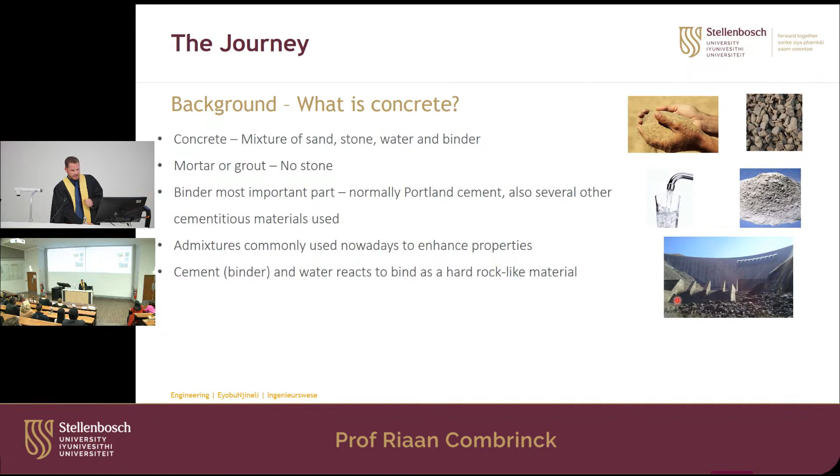So concrete is extensively used. It's used in large infrastructures like this dam. It's also used in small everyday projects. And next to water, only next to water is concrete - it's the most used material in the world next to water.

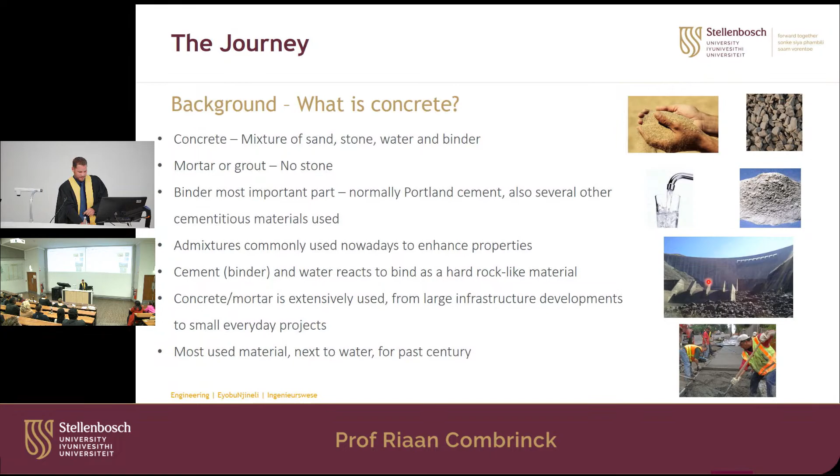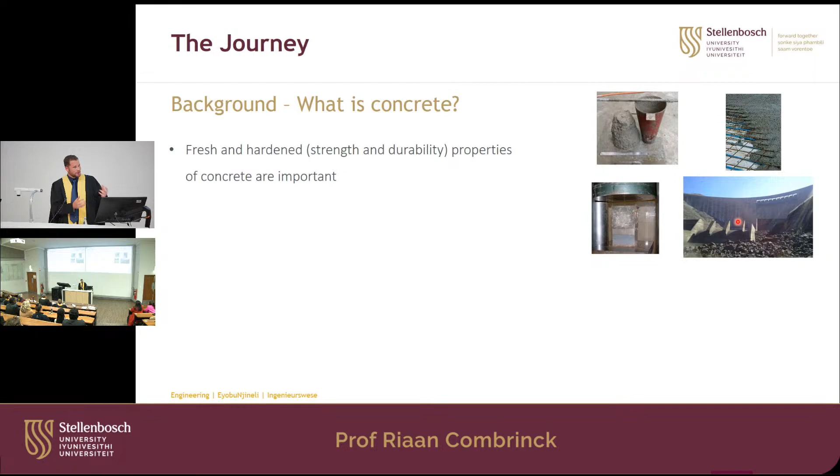Okay, so for the past century or so, the fresh and the hardened properties of concrete are very important. In terms of the fresh properties, you need the concrete to be fresh, moldable enough that you can get it into the formwork that you build for it, and also in between all the reinforcing steel. And then it also needs to be strong enough to take the loads that are applied to it. And then very important, something that's often overlooked, it needs to be durable in the setting or in the environment where you actually place it.

And concrete has actually proven to be durable. If you look at the Pantheon, which is almost 2,000 years old, it has stood for a long time as testimony. But I think there are some important lessons we can actually learn from the Pantheon if you look at how the Pantheon was constructed versus modern structures.

The one thing is the concrete in the Pantheon is only in compression - concrete likes compression, where it wants to be. So there's no tension forces, just compression. You can see in this dome of the roof, everything is just in compression. And that's very important, because once you put it in tension, it starts cracking.

Okay, and that's one of the reasons why modern structures add steel to your concrete, to actually take those tensile loads. But the Pantheon doesn't have any steel, and this is also one of the reasons why it's lasting so long, because once you add steel, with time that steel will start corroding. If it corrodes or rusts, it actually expands, the surface expands, and that cracks open the concrete, and that is the start of big durability issues for concrete.

Okay, then, yeah, it's also longer construction times. So in modern days in the world, we want to do everything fast and cast quickly, and there's time pressures, whereas in those days, they built the Pantheon over 10 years.

When you do stuff slowly, you do it more thoroughly and more carefully, and you take more care, and the quality that you get is just more. And then also smart use of materials.

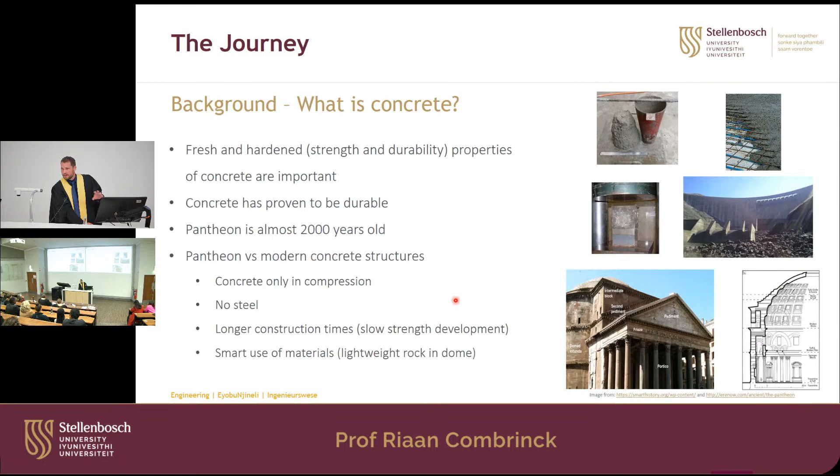For example, in the roof of the dome, they actually used lightweight aggregate to reduce the self-weight and help the roof carry the load more easily. So it's really the effective use of materials where you need it. I think there are some very important lessons in that, and why concrete lasts so long in the Pantheon.

Then some history. Evidence of concrete use goes back to 5000 BC. If you look at what they used: lime, which is calcium oxide, with shale, which is clay, mixed with some stone and gravel. The lime would absorb CO2 from the environment and form calcium carbonate, which then binds everything together.

The Romans took a big step forward and used a hydraulic cement. This is a cement that hardens above water and in water. That's very important, because the lime previously only hardened in contact with CO2, with air.

They used the hydraulic cement, and they also used admixtures like blood and eggs and animal fat. So we think admixtures are something new, but it's been around for some time. They mixed this hydraulic cement, and that's the key to their concrete technology.

And it was from a volcano. The pozzolan material they got was named after Pozzuoli, a small town in Italy, from volcanic ash that had erupted. They took that volcanic ash and ground it, and that was the binder - the first cement basically.

Then in the Middle Ages, a lot of this dramatic progress of the Romans was lost, and they didn't use pozzolan and lime burning for a long time. We had to rediscover or reinvent cement in the Industrial Revolution, about 1750 AD.

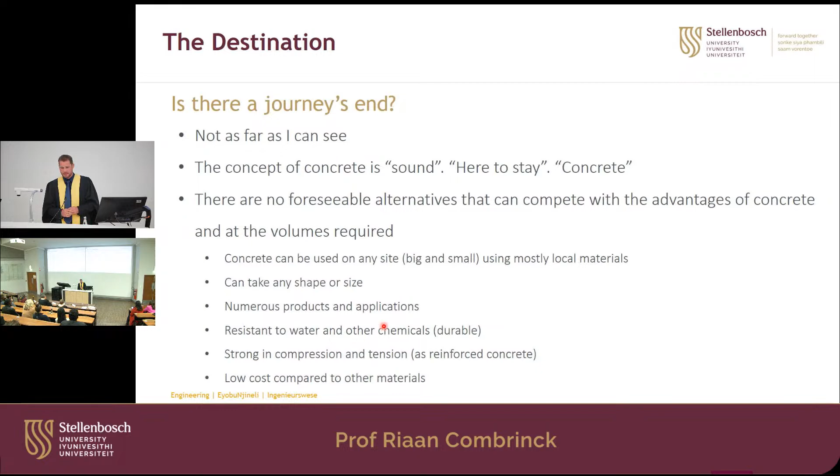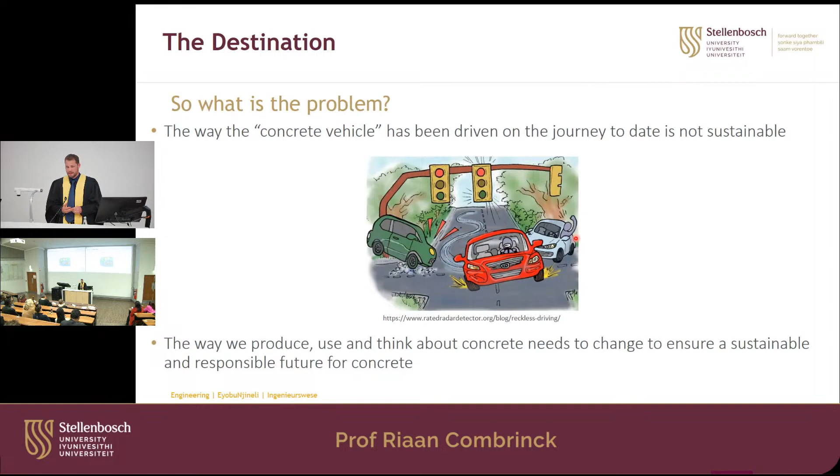So we've been driving it a bit recklessly. The way we produce, use, and think about concrete needs to change if we want to ensure a sustainable and responsible future for us and our children. So what is the main challenge remaining, I suppose? What's the elephant in the room?

If you look at the way concrete is produced: you take limestone and clay, make it in a raw mill, then heat it up to about 900 degrees and then 1,400 degrees Celsius in a kiln. Then you get clinker, golf-ball-size clinker particles, which you mill in a cement mill with some gypsum, and then you get your cement, either in a lorry or in a bag.

Now the problem is, once you heat this limestone, which is calcium carbonate, there's a chemical reaction where it goes to calcium oxide and CO2. So there's the main culprit, there's the problem—that CO2 given off just by the chemical reaction. And we haven't even come to the heating of fossil fuels to get to 1,400 degrees Celsius. That is the big problem, the elephant in the room for concrete and cement production specifically. So it's a large amount of CO2 that is emitted.

It's about 8% of global CO2 emissions. I know there's the stat that says if the cement or concrete industry was a country, it would be the third largest CO2-emitting country in the world. 65% of those CO2 emissions just comes from this chemical decomposition of the lime, and the rest is mainly due to the burning of fossil fuels.

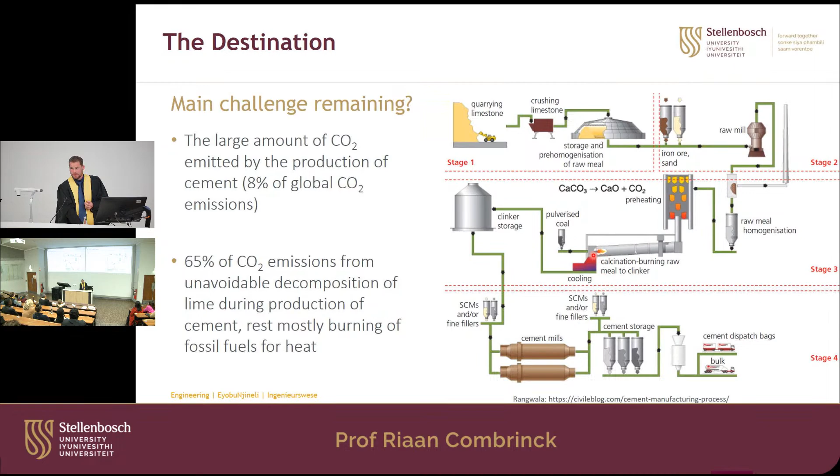Another thing about concrete to keep in mind is it actually absorbs CO2 with time, getting rid of the problem it created in the first place. It takes about 100 years, and that's the problem. With time, if you take limestone—this is the carbonation or lime cycle—you heat it up, CO2 is given off, and then that calcium oxide, which is our cement basically, with water goes into calcium hydroxide, and with CO2 from the air forms calcium carbonate again. So it reabsorbs that CO2, it just takes some time.

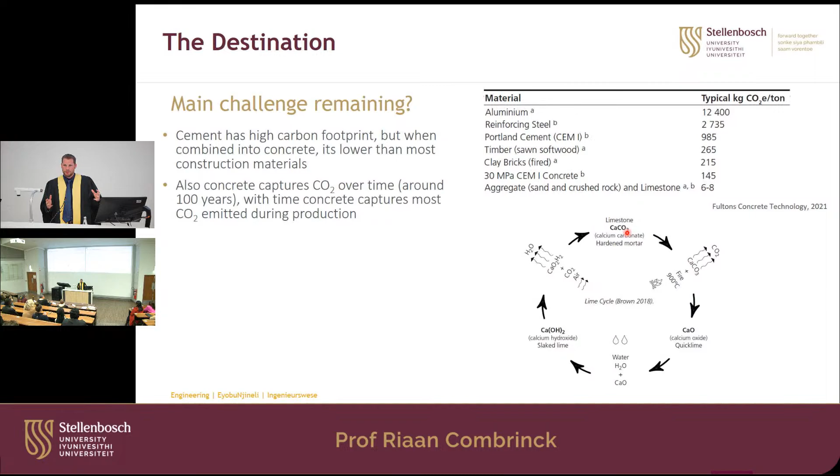So the problem is that we are not giving concrete enough time to reabsorb this CO2, and we're using too much of it too quickly because we need so much. That is the big problem—concrete's biggest issue is that we use so much of it, and because of the large volume we're using, it's giving off a lot of CO2. The problem is the vast quantities, volume, and rate at which we use it. So global and local commitments have been made to reduce CO2 emissions for the cement industry to zero by 2050.

Quite the challenge, quite the goal. And given the expected use of concrete in the future, there's no way you can reach this CO2 emissions zero by 2050 by just using less concrete. Because then you'll have to tell people, no, you can't get a home, you can't get infrastructure, you can't get a new mall. So it's not about using less concrete. So what do we need to do?

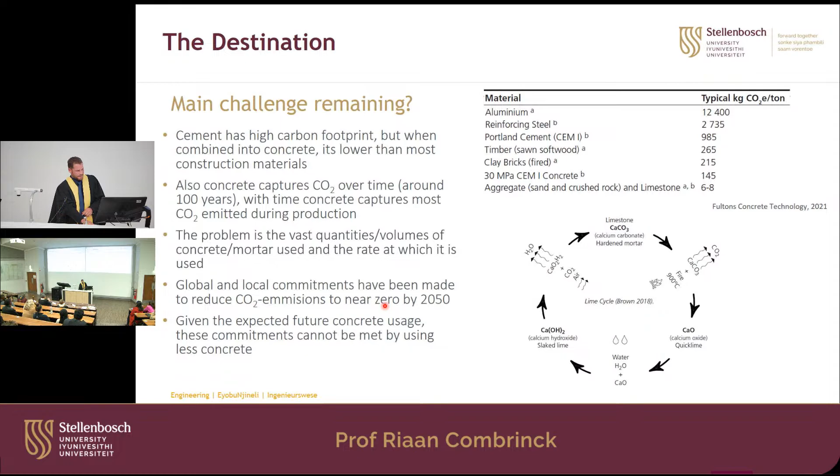One of the solutions, I'm going to go through a few, but one is definitely in cement production. I think cement will need to change. We're going to still have concrete—concrete as a concept is sound. You have a binder that binds rock and sand with water and binds everything together. But the cement that we use needs to change.

If you look again at this production process of concrete, you can change the raw materials. The lime that you use here, the limestone, we maybe need to start using magnesium oxide, which is in the mantle of the earth. It doesn't have any CO2 to it, so if you heat it up, there's no CO2 given off. And maybe this clay that we add as well, we need to use a higher quality clay, so that the cement we get is higher quality, and then we can use less cement to get the same strength.

The fuel that we use—we are already burning tires, but we maybe need to use other waste materials in this burning process as well, or maybe use alternative fuels like solar and wind to actually heat up and get the temperatures that you need. Also the milling process, what we use to mill, we can add things like graphene and grinding aids, which I'll talk about later, to make that milling process more effective. So the cement companies really need to come to the party and change the way we make cement.

Then carbon capture is also a big thing, if you can actually capture CO2 where it is emitted. I know there's a company that actually takes the CO2 and bounds it in pellets. So there's also a lot of potential there to capture the CO2 where it is emitted.

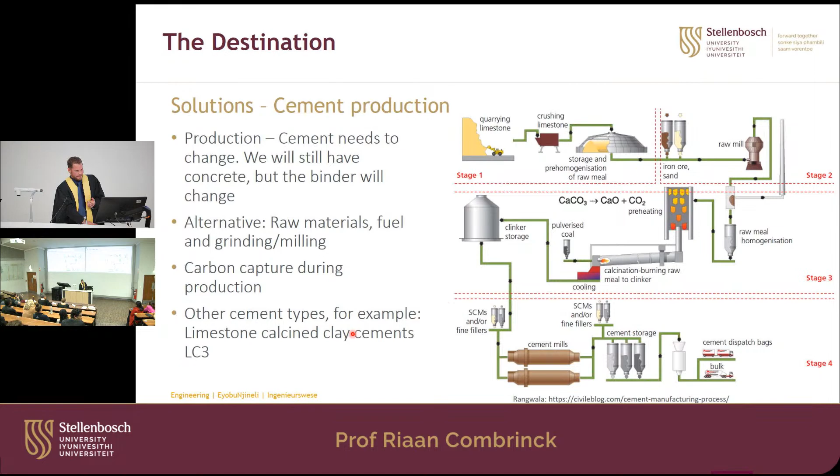Then there's also other types of cement that we can use. There's this LC3 cement, which is a limestone calcined clay cement. And if you look at this cement, the reason it has so much potential is because if you look at the clay deposits all around the world, there's a lot of clay. It's similar to limestone—that's why concrete is so successful, because there's a lot of lime all over the world and you can make it all over the world. And the problem with things like slag and fly ash is that they have only limited availability, but clay is available worldwide.

So if you take this clay, you don't have to heat it up to 1,400 degrees, only about 600 to 800 degrees, so less CO2 is given off due to the burning of fossil fuels, and also there's no CO2 given off due to the calcining process. So if you just add 15% limestone and 30% calcined clay with this new type of binder, you can almost halve the amount of CO2 produced compared to a normal OPC mix.

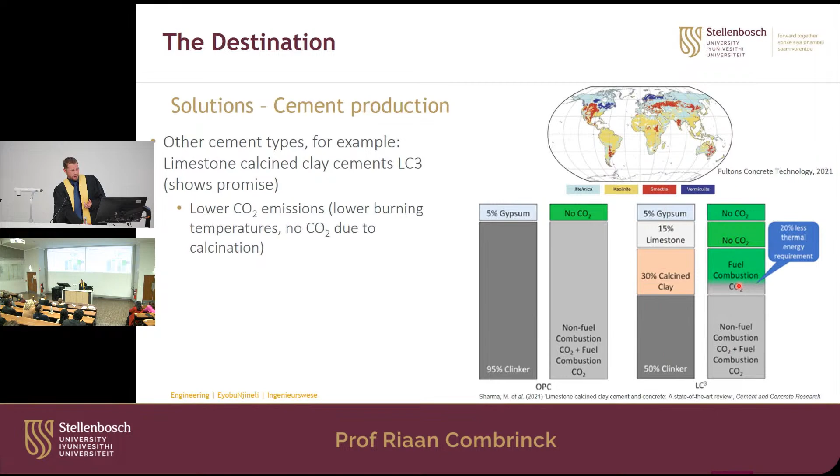So what are some of the other solutions we can consider? Better design—especially, we need to think of durability and not just make the concrete strong enough to take the loads; it needs to be durable for longer. In terms of this, I think we've been designing for a 50-year design life, and I think that's not enough. We must start aiming for 100, 200, 300-year structures, not just 50 years. I think we're a bit short-sighted there, and we must leave structures that last longer for our children.

Then also using thinner and more optimal elements—only use the material where needed. The 3D concrete printing concept has a lot of promise there, and then also less wastage. So the precast industry, 3D printing—there's a lot less material you can use to reach the same goal. Then also less defects, cracks, and other durability issues just shorten the life of the structure, so if you can get rid of those defects, you'll have a structure that lasts longer as well. Then the concept of circularity is also very important.

We need to reuse and repurpose structures and materials. So if you have a structure, you demolish it, you reuse the beam, you reuse the column. The materials, you maybe crush it and you use construction and demolition waste as your aggregate, or you recycle materials from other industry. And also there's some alternative and underutilized materials, which I'll also mention in a while.

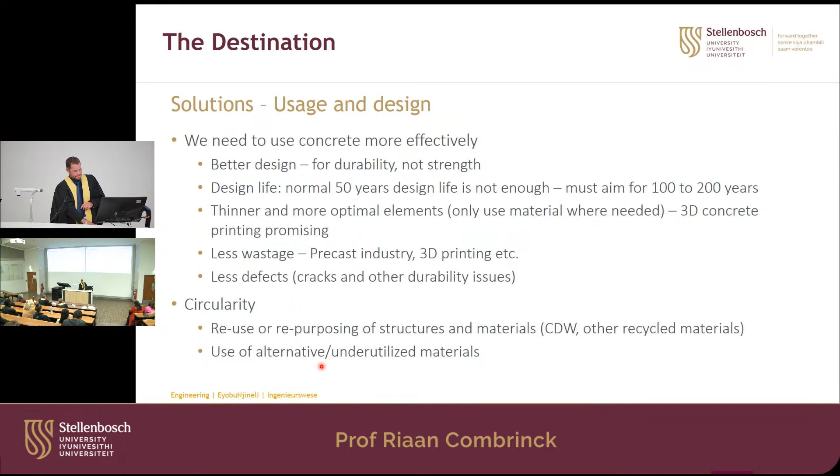Okay, so this is how the Global Cement and Concrete Association see it. So they're the one that made the big commitment, with a lot of industry partners as well, that we need to reduce our CO2 emissions to 0 by 2050. And some of the solutions that they propose is efficient design and construction, efficient concrete production, saving in cement and binders, saving in clinker production, carbon capture, decarbonisation, and then also just the CO2 sink, the recarbonation of the concrete itself.

But the point I want to make here, as you can see, it's not just one solution. There's not going to be this one wonderful solution and then it's going to solve everything. It's going to be a combination of a lot of different industries, a lot of different role players, and different strategies, and all of them combined will actually make us reach our goal.

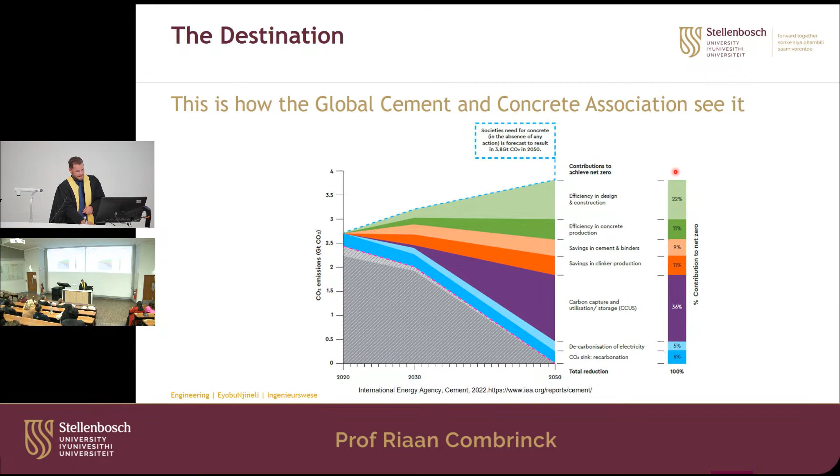Okay, so where does my research fit in? What have I done so far? So based on the arguments which I've sort of tried to make is that concrete is here to stay for the foreseeable future. And there's not a single solution that will solve everything, but rather several solutions, and that everyone needs to contribute. Researchers, producers, engineers, contractors, governments, and the public. Everyone needs to come on board.

And based on that, the goal of my research to come and what I've done so far is to improve as many aspects of concrete as possible to ensure concrete's future. And the mindset that I have is that any improvement, even if it's a small improvement, if that improvement can be made, it can have a big impact in the long run. So if we're going to use concrete for the next 1,000 years, and we can make a percentage difference in this research over that 1,000 years, it contributes quite a lot.

And then the sooner these improvements are implemented, also the bigger the impact. So if we find something now and we only implement it in 30 years, that's 30 years that is lost. So the sooner we implement these new research and solutions, the better.

Okay, so what have I researched so far? So I researched into the main concrete constituents. So I looked into research in using water better, cement, binder, also aggregates. I research defects a lot, and also the weaknesses of concrete, which is cracking, alternative reinforcing, and compatibility issues, and then also a little bit of aesthetics and functionality.

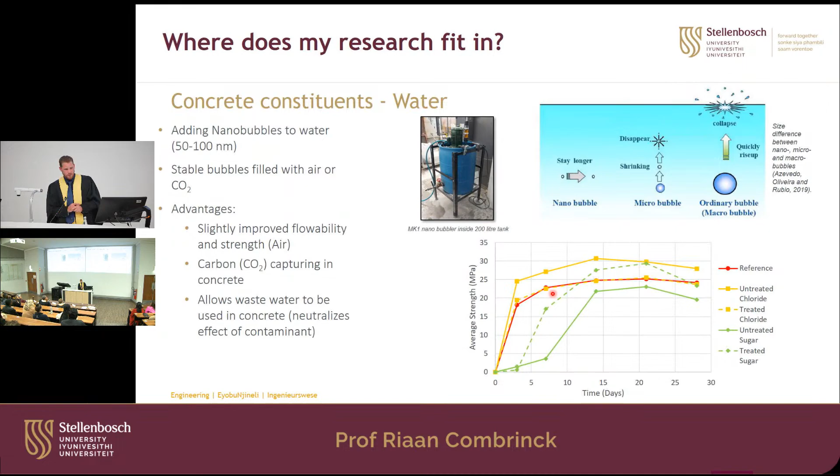Then concrete, so in terms of the cement and the binder. I'm going to discuss compatibility issues between cement and admixtures in a later slide, but here it was mostly using nanographene. So this is another small particle. Nanographene is like a honeycomb-like sheet of chemically bonded carbon atoms, hexagonal, with a diameter between 5 and 50 nanometers.

And it's a very thin platelet, we call it. It's about 1 atom thick. It's very light, stiff, and strong with a large surface area, but it's also expensive. But we add a very low dosage of it. Admixtures you normally add at 1% by mass of cement, but here we can actually add only 0.01%. And if you calculate the number of particles, that's millions of particles that you add, actually more than the cement that you add.

So small these particles. So there's potential to drastically improve concrete properties, but the practical application remains difficult because the particles are so small, they tend to flock together. So the real challenge is deflocculating and getting those nanoparticles spread evenly in your concrete. So what we've done so far is mostly research on application techniques. We've been dispersing it in liquids, in the cement, also coating aggregates. We've been using it in combination with other nanomaterials, colloidal silica, nanocement. We're using it to improve the interlayer between 3D printed concrete and also waterproofing of concrete.

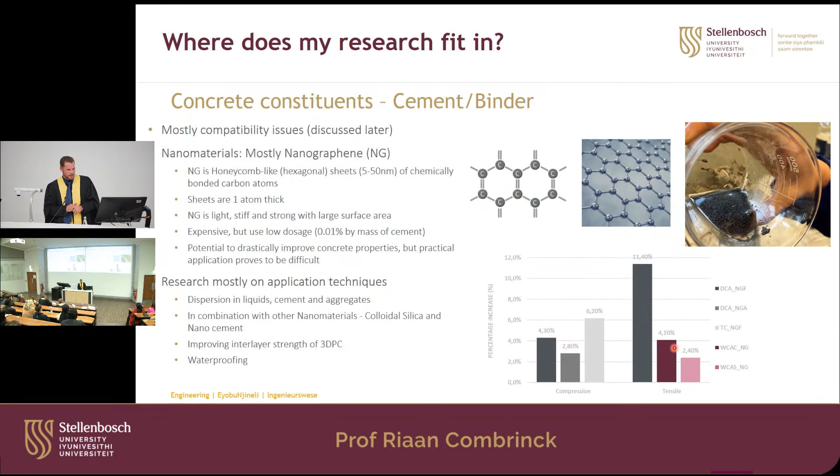And we've had some better results, but some of the initial results show that we couldn't get the compression strength that much higher, because this application technique is so difficult to get right. But for most of them, we've been seeing a big increase in tensile strength. So even if you get the application method wrong, you get the increase in tensile strength. So watch this space. We are working on it, and I have a feeling if we can get this right, it can be a big game changer in the cement and concrete industry. But we only started with this last year, so give me some time.

Okay, then aggregates, so sand and stone as a resource is also under pressure, with the environmental impact of mining sand and transporting it. I think it was in 2021, about 50 billion tons of sand was mined in that year. And then $1.5 billion of sand is also imported and exported. Some countries don't even have sand that they can use for construction. They need to import sand for their concrete.

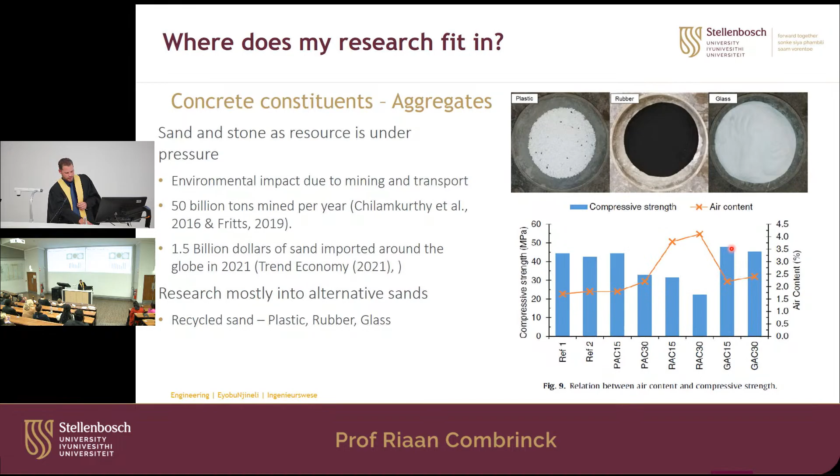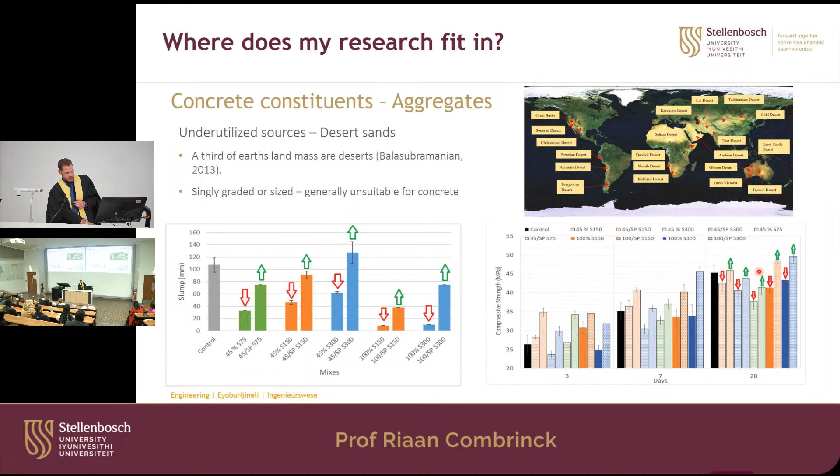Okay, so early age cracking was where I did my PhD, so I did a lot of work on that. So this is the cracking in concrete in the earliest stage, while the concrete is still plastic, so before the concrete sets, normally 12 hours after casting, so it's really fresh concrete. And it's normally in concrete slabs like this, where you have a high evaporation rate and some reinforcing steel, which is your restraint, and that makes the concrete crack. And this happens very, very early, once you've cast the concrete.

And there's two main types. There's plastic settlement, when you have reinforcing steel, and if there's no reinforcing steel, you can get cracks like this. And you can see the crack that you get with this early age cracking goes directly to your reinforcing steel if there is reinforcing steel. So it's really premature durability issues early on in the life of the concrete.

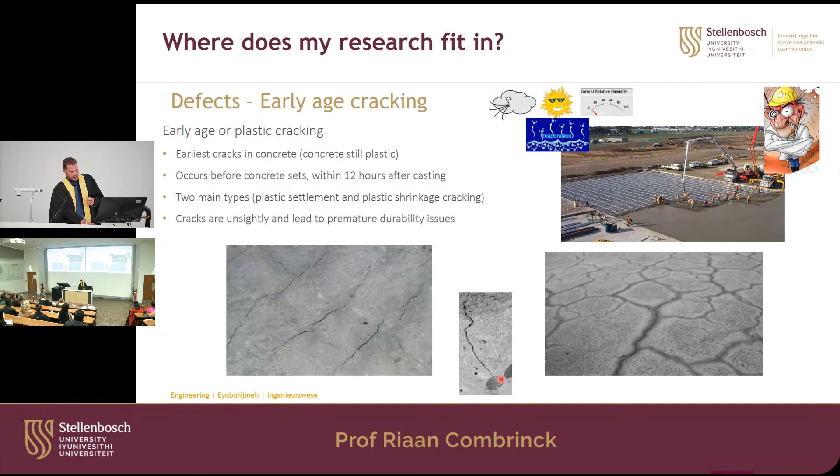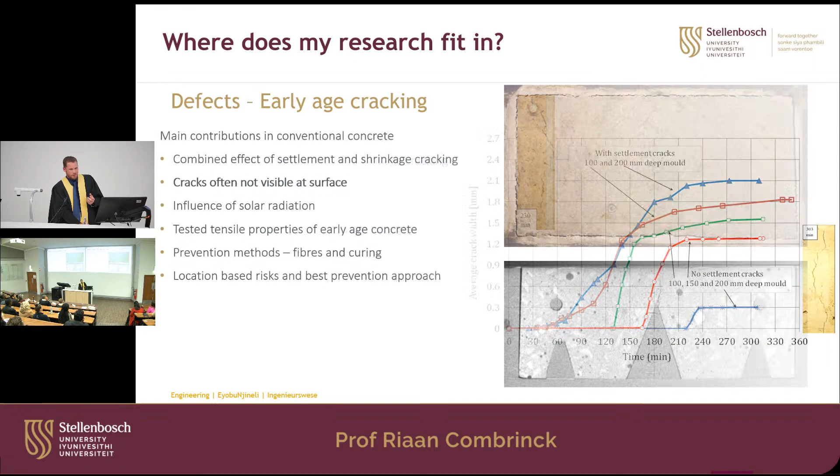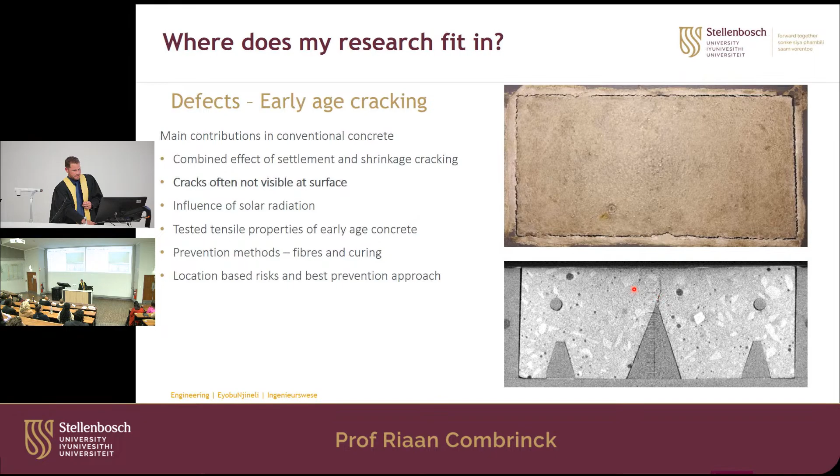Then the influence of solar radiation. So we test with and without sun. This is also very important because most models that you predict evaporation with don't include the impact of solar radiation. So we've done tests, some of the nicest tests we've done, with a view on top of the civil engineering building, with and without shade.

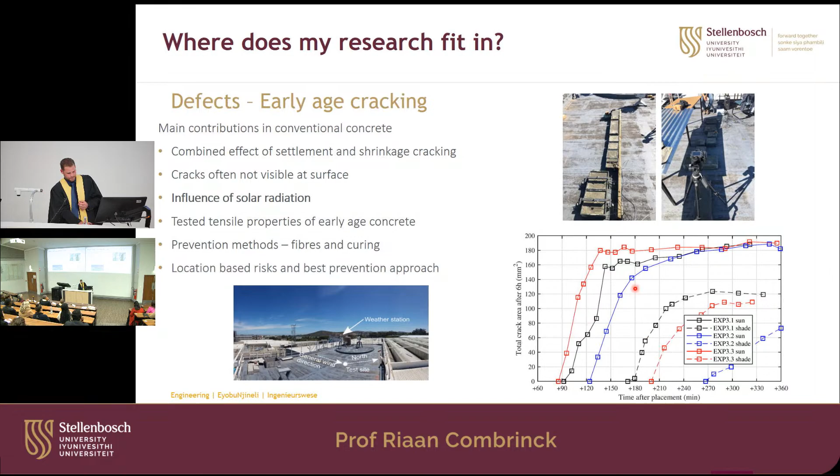Okay, then tensile properties. This is something I did for my PhD. We had to test the fresh properties of concrete, and this is quite difficult because concrete is flowable. So we developed this mold that floats on an air bearing, and then it floats on top of that. And you pull the two halves out of each other, and then you can measure the stress-strain relationship. And you can get the tensile properties and its behavior, and then you can model it to see how much cracking can actually happen.

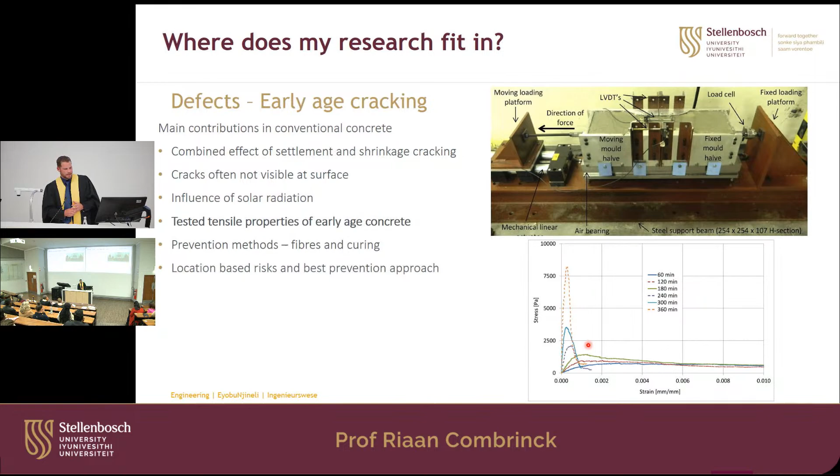Okay, then preventative measures. We looked a lot at curing and fibers. So this is the crack area with time, and you can see this is uncured samples. And once you add a little bit of curing, this is normally curing water, you can see you reduce the cracking size, but with multiple curing and curing agents, you can even prevent the cracks completely.

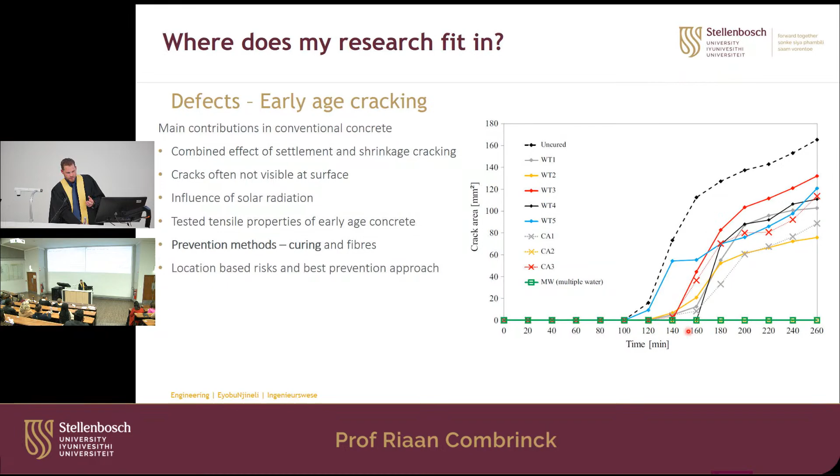Okay, then also location risk-based analysis. We looked at what is the best approach to reduce these cracks if you're casting in Cape Town versus Beaufort West. And we took hourly data, and statistically you find what is the evaporation rate at a certain time of day, and also based on the seasons. And based on that, you can say what is the best time to place your concrete. And you can also look at what are the most influential weather conditions.

So, for example, in Beaufort West, it's more temperature. So you must maybe not cast in the middle of the day when the temperature is hot, but maybe later in the day. And in the Cape, it's more wind. So there, using windbreaks is more effective at reducing the cracks.

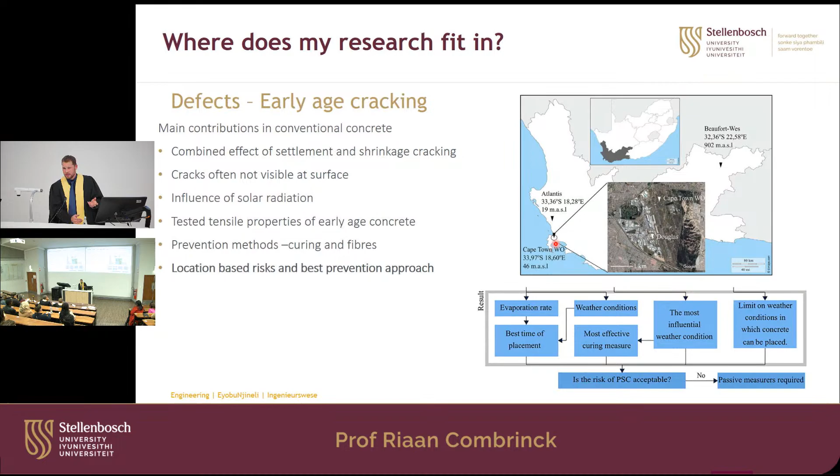Okay, then 3D printing.

So this is a nice thing about concrete. Once you think you've done your research, someone invents a new type of concrete, and then you have to test everything you've learned on the old concrete on the new concrete as well. So 3D printed concrete evaporates from all sides. It doesn't have formwork as a traditional concrete, and that makes it more vulnerable to plastic shrinkage cracking.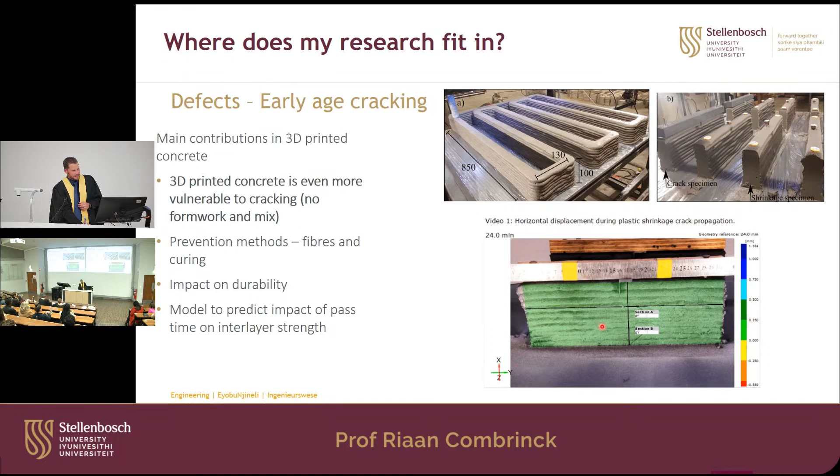Then just in terms of durability, what is the impact of these cracks on durability? So we took 2 samples, one where we allowed cracks to happen by restraining it, so cracks or interlayer slip, and one sample where we did nothing, so no potential for cracking. And then we tested the permeability, and the more permeable something is, the more the durability issues are going to be, because the more those aggressive substances enter. And as you can see, the restrained element which has cracking has a much higher permeability, so a much lower durability compared to one that has no cracks.

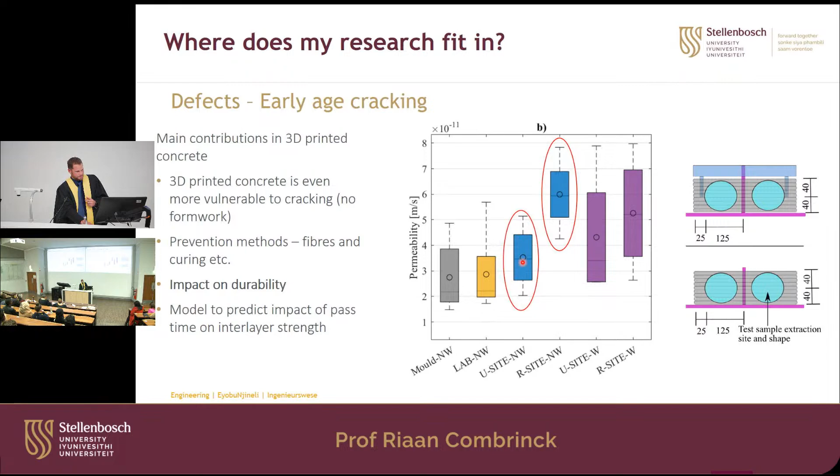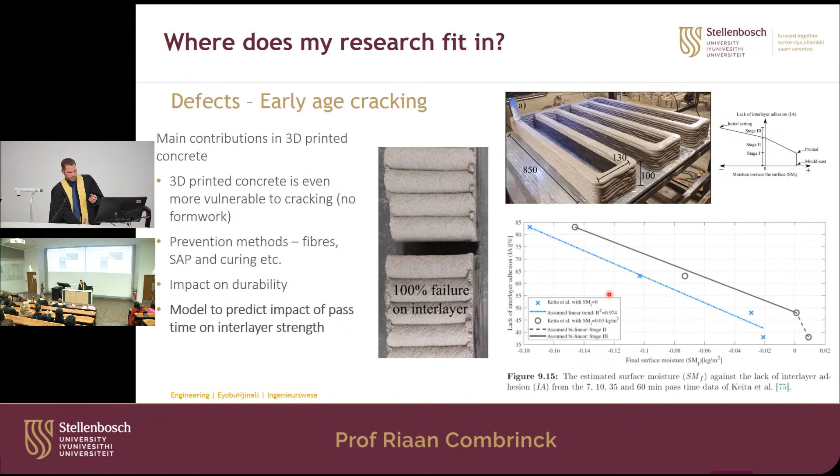Okay. Then we also looked at a model that actually predicts interlayer strength. As you go with your nozzle, you'll see the pass time differs. So as you print your concrete, the pass time differs. And if the pass time is too long, you will have a lot of water that evaporates, and that influences the porosity and also the strength. And we've developed this model so you can predict the amount of surface moisture that is evaporated. Then you can see what is the impact on the interlayer strength that you're going to get, the reduction in it.

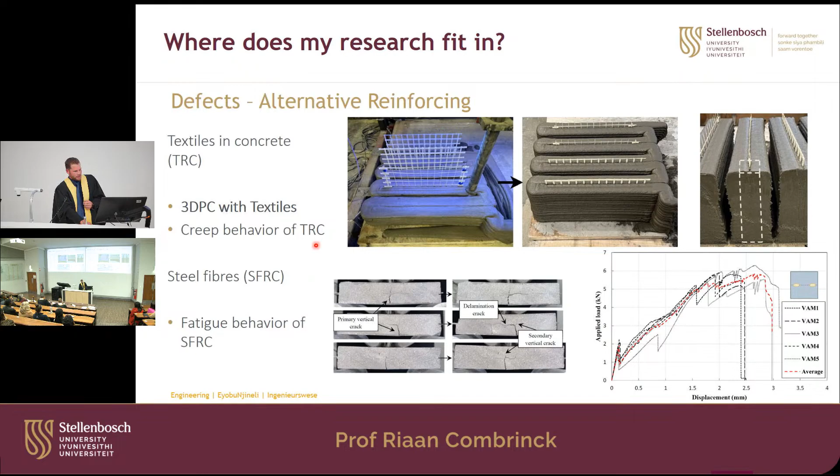Okay. Then alternative reinforcing: we've been looking at using textiles in concrete, especially 3D printed concrete as well, and then testing it and seeing how the cracks developed. This is the load versus displacement graph. Normal concrete just goes up and cracks, but once you add the textile reinforcement, you can see there's much more tensile capacity that you can get from your concrete. We're also looking into creep of textile reinforced concrete, and then also using steel fibers in concrete.

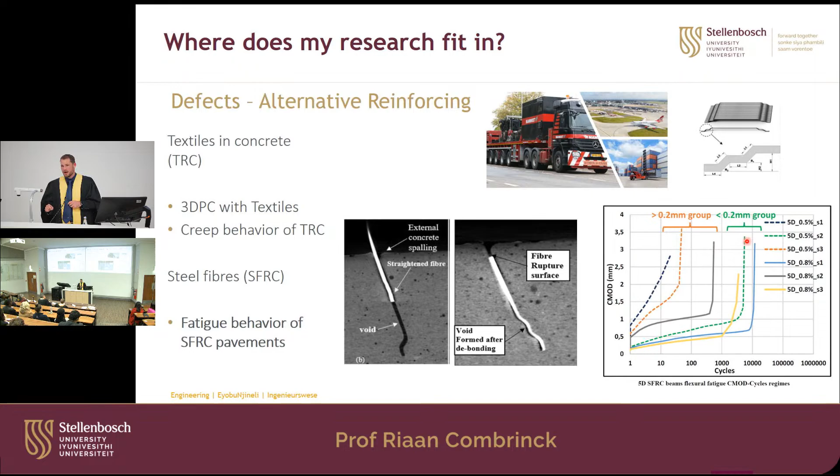Especially for pavements, so roads, steel fiber reinforced pavements. What happens here, you have a big truck running over your concrete and it cracks the concrete. Now that concrete is subjected to repetitive loading due to that truck running over it over and over again. And with time, the fiber either slips out or pulls out or it fractures. And we had a look at that initial crack. If it was a big crack, your cyclic life, your fatigue life, is much less than if it was a small crack. And it just highlights how important it is that our transport authorities actually get rid of those overloaded trucks, because it gives that initial high crack and it really shortens the life of your concrete structure.

Okay, then compatibility issues. There's a big variety of cement and admixtures. Just look at this PPC cement. It has the same name, but if you buy it in Cape Town, it will be this one with limestone. But if you buy it in Gauteng, it will be this one with fly ash. So there's a lot of different cements, even if they have the same name. There's also a lot of different admixtures. There's also imported cement. There are new types of cements coming on the market, and when you mix all of these in concrete, the fresh properties often differ. So problems happen if you change the cement or the admixture midway in the project.

So you've been using this cement, and you're going to use it for 6 months in a project. You've used the same cement for 3 months, then suddenly it's not available anymore and you switch to a new cement. Now suddenly your mix isn't workable for 2 hours anymore, it's only workable for half an hour. Suddenly you can't cast it anymore, so there are big cost implications.

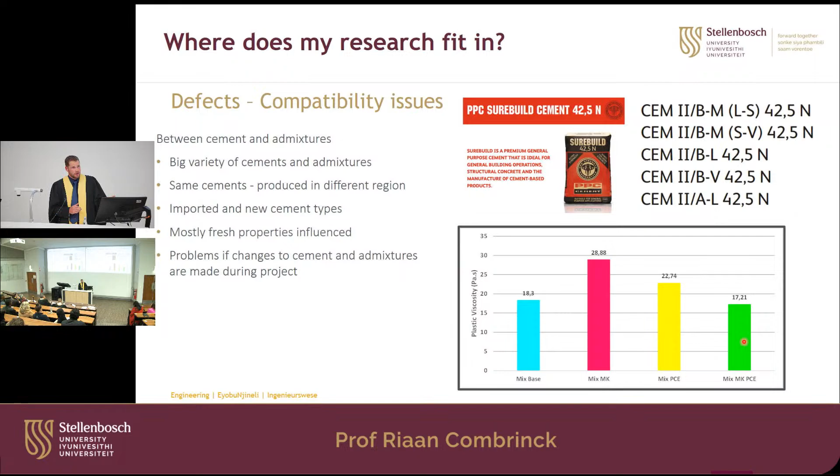Some of the work we've done here: this is just a base mix, a normal Portland cement mix, and this is the plastic viscosity, showing how sticky the mix is and how difficult it is to work with. If you add metakaolin, the viscosity increases and it becomes more difficult to work with. If you take that base mix and add a plasticizer, the viscosity also increases, because often super plasticizers contain a viscosity modification agent. But if you take that same super plasticizer and add it to the metakaolin mix, the viscosity actually decreases. So often it's these unknown, unexpected events that happen, and you need to know this is going to happen if you change your cement midway in your project.

Okay, almost finished. Aesthetics and functionality are also important. I believe if you have concrete that is more beautiful, it can be used for longer and can be more useful to society. So we've been adding paint waste to concrete - it does decrease the strength if you use a lot of it, but it gives these white, or different colored, painted finishes, which makes the concrete quite beautiful for me.

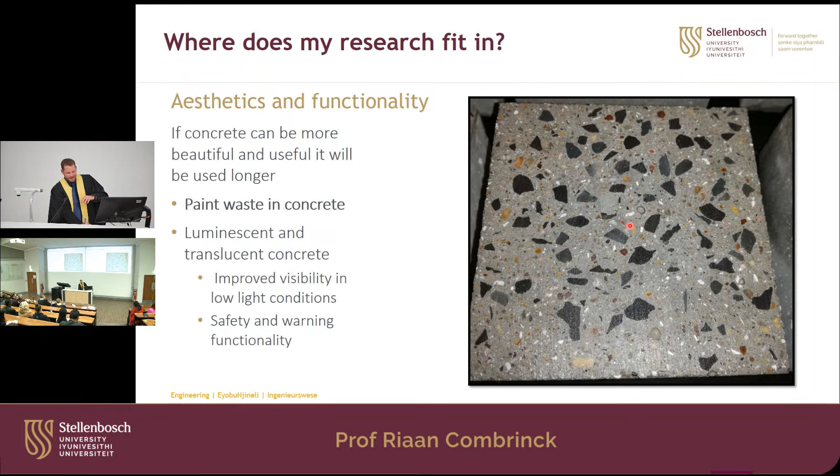Then there's also translucent or luminescent concrete, for improved visibility in low light conditions, safety and warning functionality. We added fiber optics to the concrete, and we have a glow-in-the-dark aggregate in the wall that charges from the outside. If load shedding happens, hopefully we can still see, because it's emitting its light. This is a traffic sign we erected, charged either via sunlight or maybe the lights of your car, and it emits light so you can see it when there is no light.

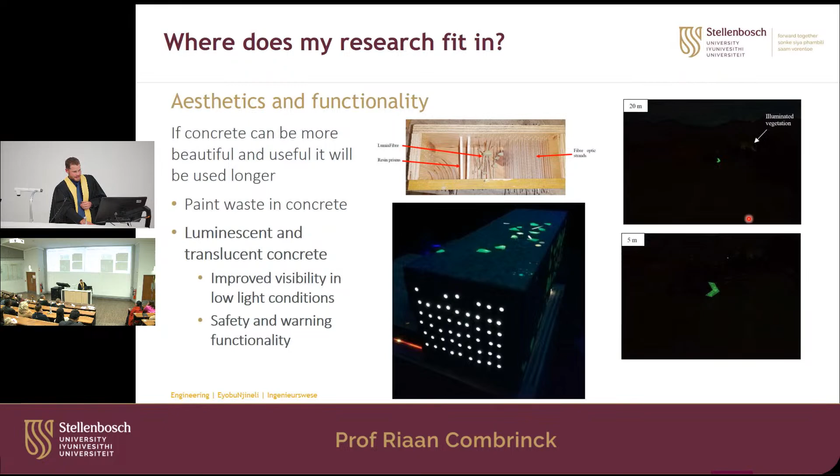My research has just started. I've built on research from the current and past research community, and without them it wouldn't have been possible. As my mentor, Professor Billy Boshoff, said in his inaugural lecture about 10 years back, he loved concrete. Billy, I also love concrete. And if God wills it, I will continue to do research on concrete with my students for the next 30 years.

Acknowledgments - can I continue? Okay. I think the Dean, Professor Wikus van Niekerk, thank you very much, and also the Vice Deans, Professor Petri Meyer and Professor Celeste Viljoen, thank you very much. I realize how much time it takes to go into the admin side of things, so your leadership is really appreciated.

Then the following four groups of people in the civil engineering department - I specifically didn't want to mention names because I'm scared I'll miss someone. All the laboratory staff, your assistance in the lab with the tests and all those things - without you there's no way I could lift all that concrete. And also my students. And the administrative staff for their general assistance, but also specifically with finances for students and the postgraduate administration. I think you know who you are, but thank you very much.